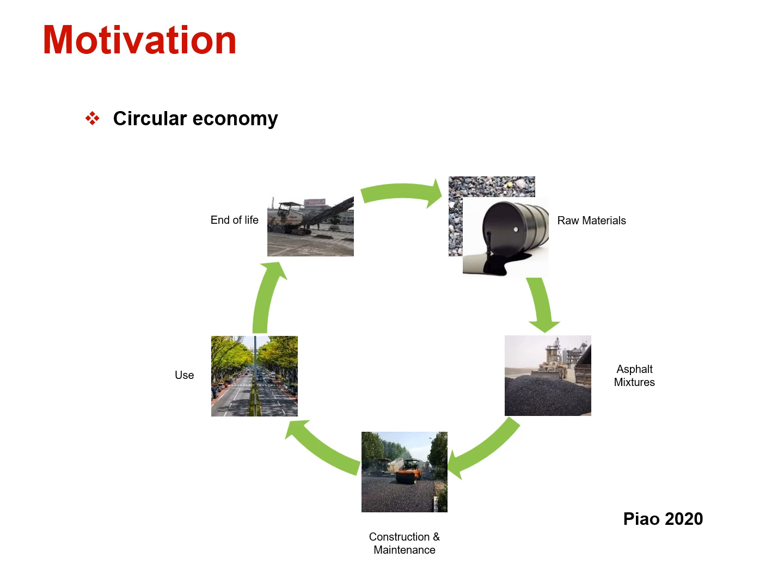I would like to begin by giving you a motivation about why we came up with this TC. So the main motivation is to contribute to the circular economy, of course. So here we're talking about the choice of raw materials, but we want to be environmentally friendly in all aspects of our mixture. For example, when we prepare the mixture, during the construction phase, in the use phase, and the end of life.

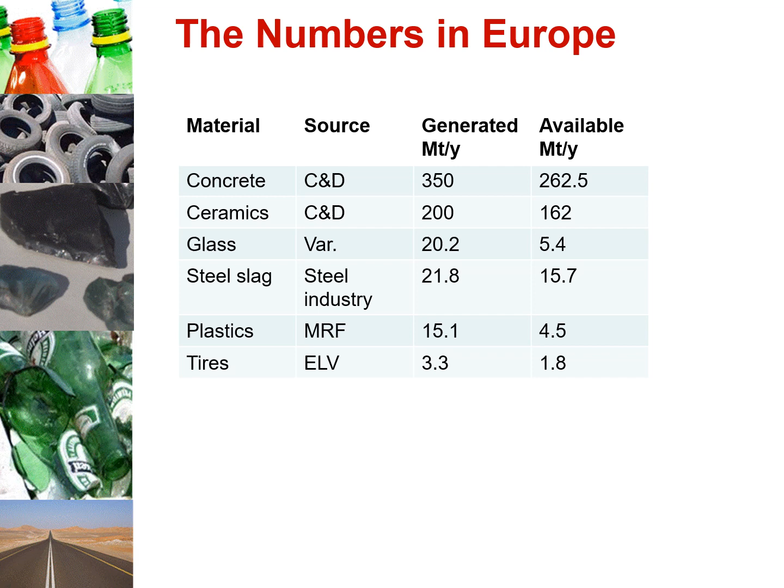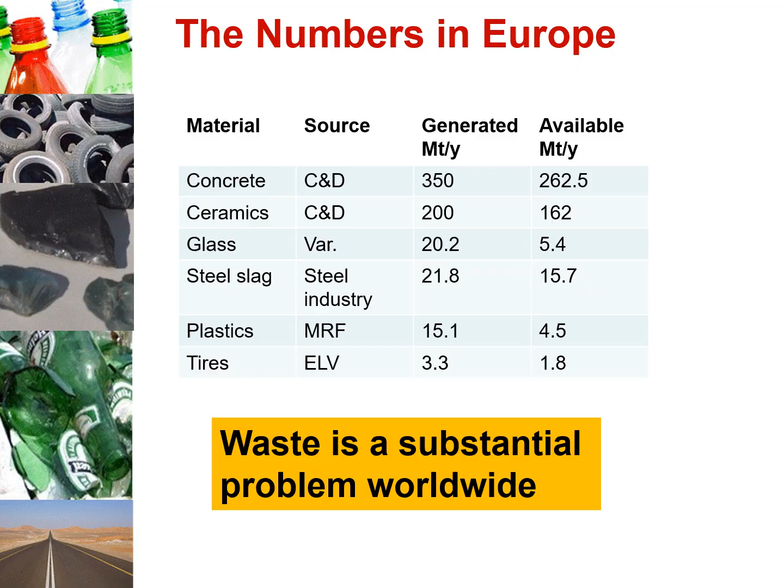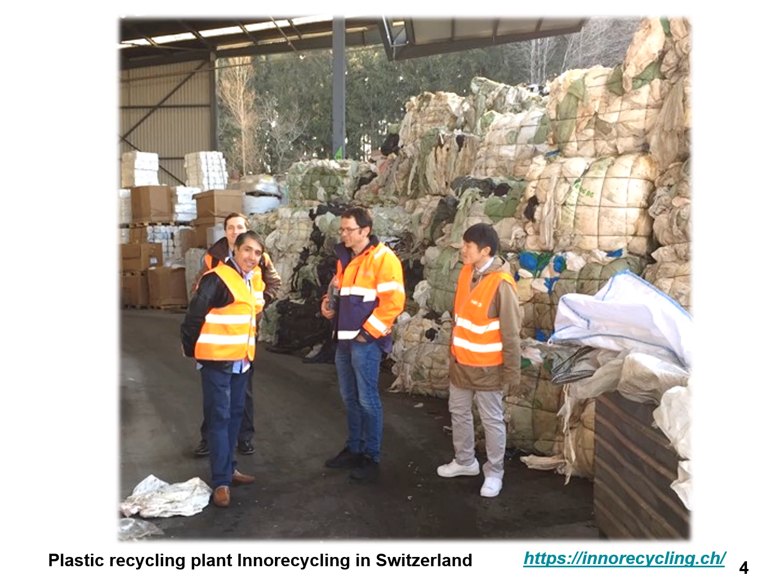So waste is not limited to Europe. There is a substantial problem worldwide, and many countries are trying to do something about it. If you visit any of the recycling plants, like we have done here in Switzerland, we visited a polyethylene recycling plant. Here you see the mountains of waste, and it becomes more of a pressing issue when you see this.

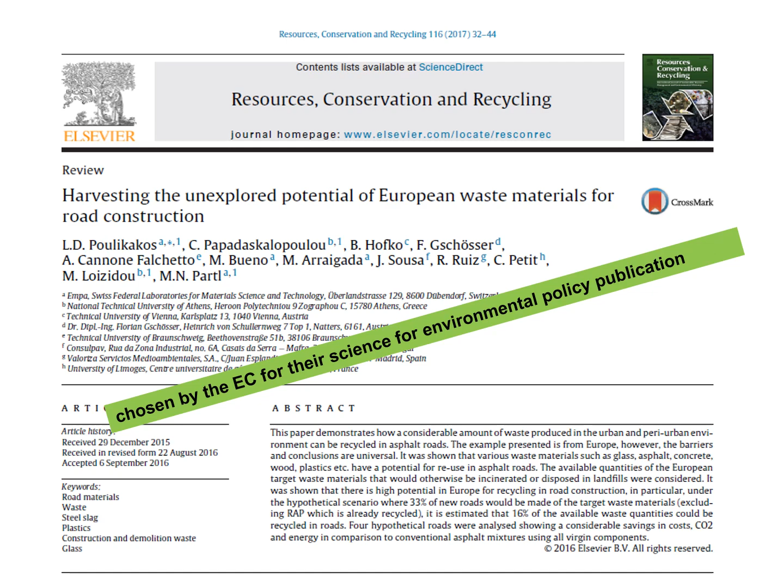In 2017, we published a review paper about using waste, and this paper was chosen by the European Commission for their Science for Environment Policy publication. What we learned from this paper was that there are some waste materials that could be options for roads. They should be exploited further. We looked at various scenarios. We looked at the life cycle assessment, life cycle cost assessment, and we saw that it's possible to save in cost, CO2, and energy consumption. However, the technical readiness level for these materials was not the same. It varied amongst materials and in different geographic locations.

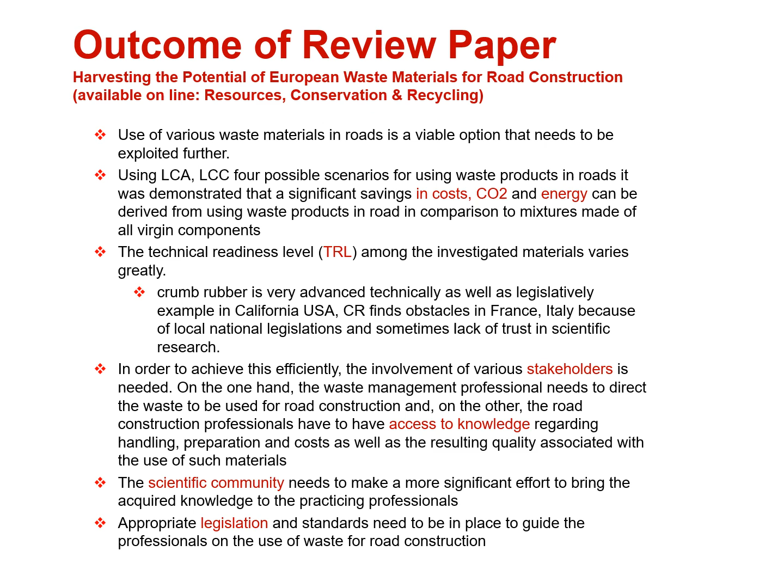So what we saw is that it's very important to have all the stakeholders involved. We have to have access to knowledge on how to use such materials. The technology might vary. And our community, the scientific community, can make a more significant effort to bring this kind of knowledge to the practicing professionals. And that's where RILEM plays a very important role. Also, we need legislation and standards for use of such materials.

Coming back to the technology readiness level, or TRL, it's a scale that was developed by NASA to evaluate the various types of technologies. So, in terms of our materials, you see, for example, that crumb rubber using the wet process has a very high TRL. We estimated it to be from 7 to 9, whereas, for example, recycled glass has a much lower TRL. We estimate it to be about 4, because its use is primarily at the laboratory scale. You can find the whole analysis in the paper that is referenced below.

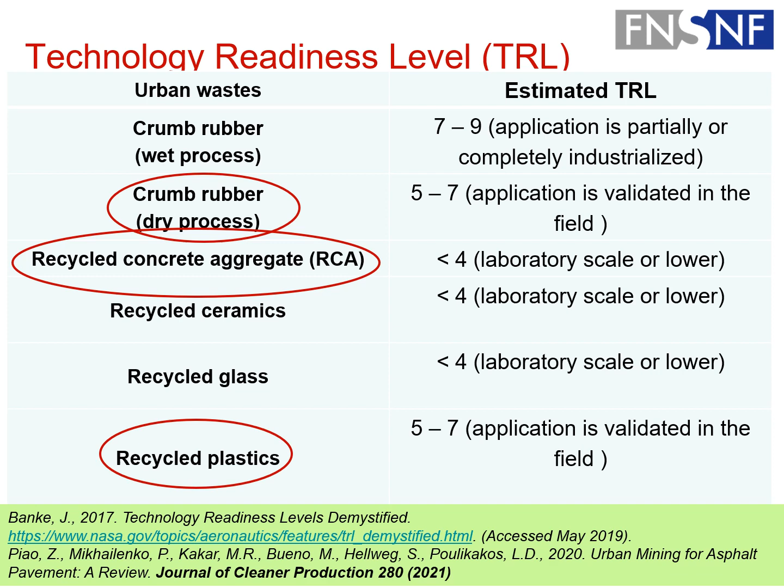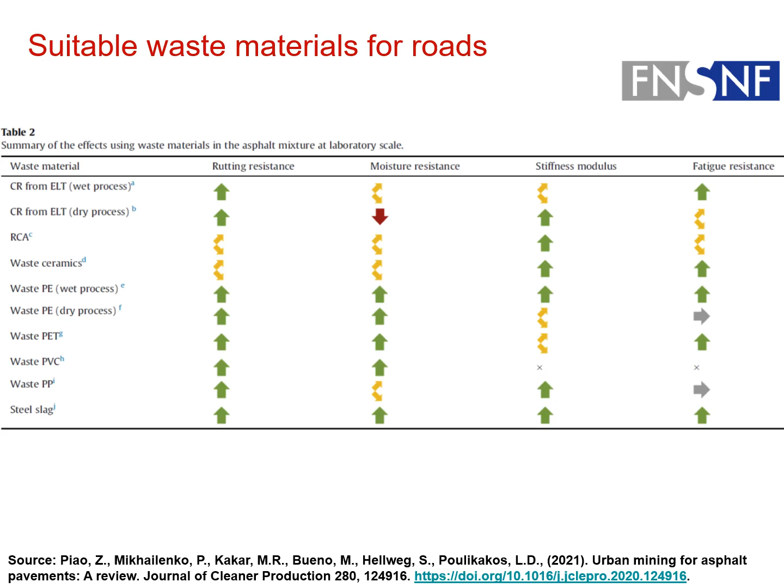Therefore, we put together a technical committee in 2017. It's been active since 2017. And we've had Bernhard Hofko from TU Vienna, who was our deputy chair until 2019. And as I mentioned, Emiliano Pasquini from University of Padua has been the deputy chair since 2019.

We started in 2017 and we've been active for 5 years. We have had more than 100 members. It shows that this topic is of interest for our community. And we've had many active members. So not all the 100 are active, but many have been active.

What we have done in this TC is to combine a literature review with experimental work. We wrote very detailed test protocols, and we also wrote a state-of-the-art report that was just published. We have published various papers in scientific journals, and we are in the process of producing recommendations. Some recommendations have already been published in the STAR report.

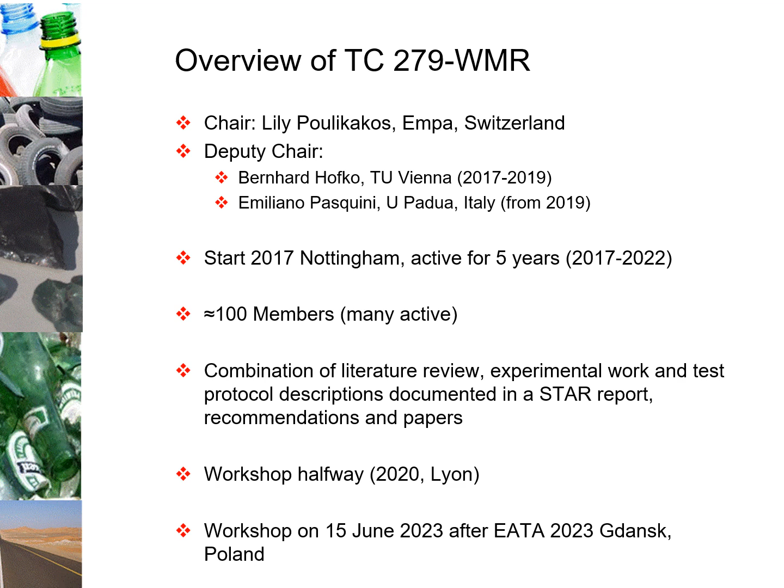We had a workshop halfway in the conference in Lyon, and we also had a second workshop at the end of the TC in June of 2023 at the European Asphalt Technology Association conference in Poland.

We had designed 5 task groups. Task group 1 was on waste plastic modified asphalt binders. The leader was Marjan Tušar from ZAG. TG2 was on crumb rubber modified asphalt binders. The leader was Jorge Pais from University of Minho.

TG3 on waste aggregates in asphalt mixtures was led by Fernando Moreno, University of Granada, Augusto Cannone Falchetto from the University of Aalto, Emiliano Pasquini from the University of Padua. TG4 on environmental risk assessment was led by Oumaya Marzouk from Cerema, Gaetano Di Mino from University of Palermo. However, this TG was unfortunately not active through the life of our TC.

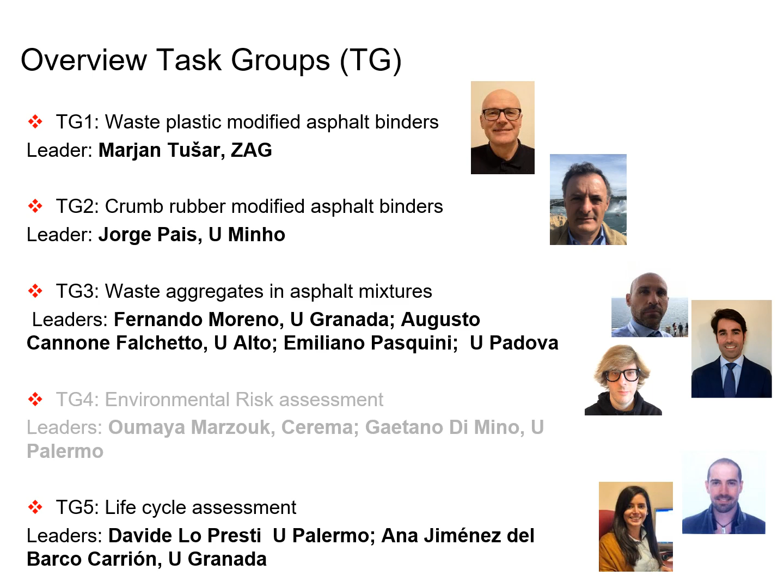And TG5 on life cycle assessment was led by Davide Lo Presti from University of Palermo, Ana Jimenez del Barco Carrion from University of Granada. We were able to conduct various meetings every year since 2017. Also during COVID, 2020, 2021, we were able to have various virtual meetings, and actually the TC remained very active.

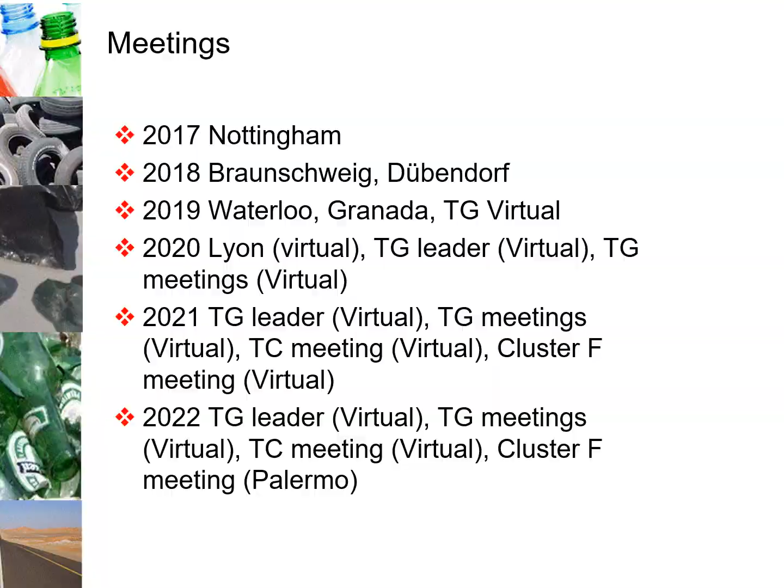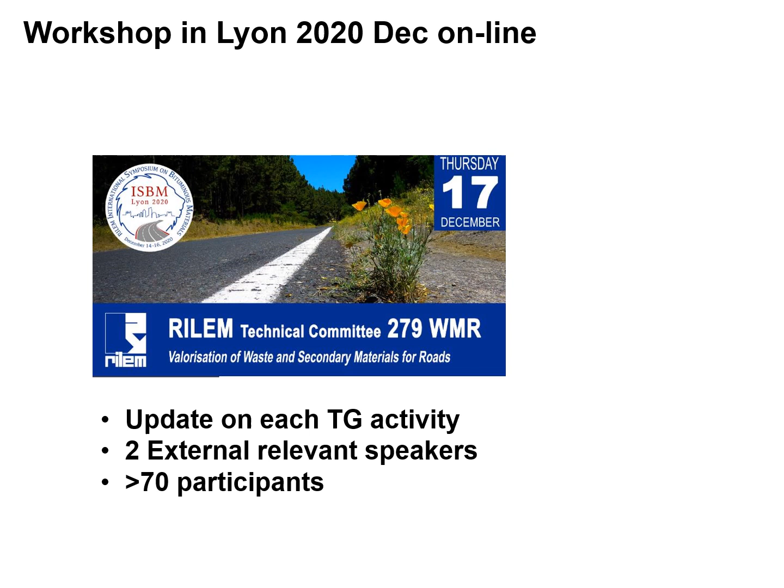Our first workshop was in Lyon in 2020. This was online. We reported on our TG activities, and we also had invited 2 external relevant speakers. We had more than 70 participants online.

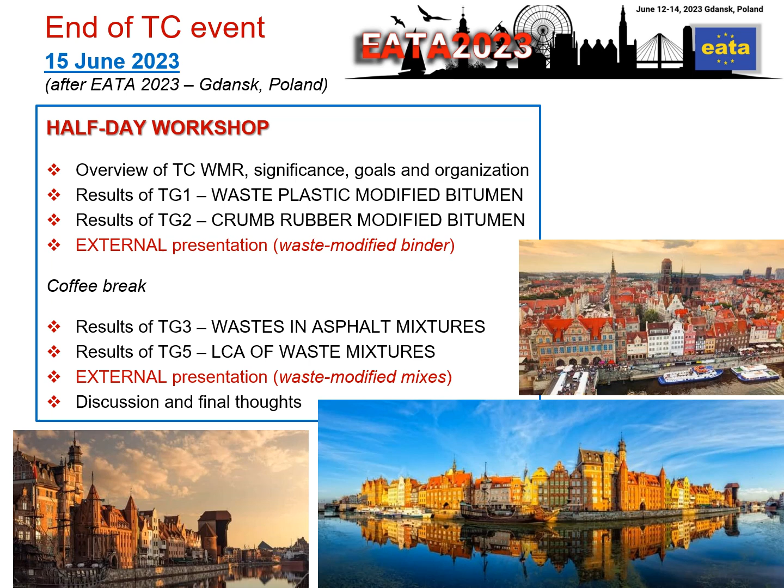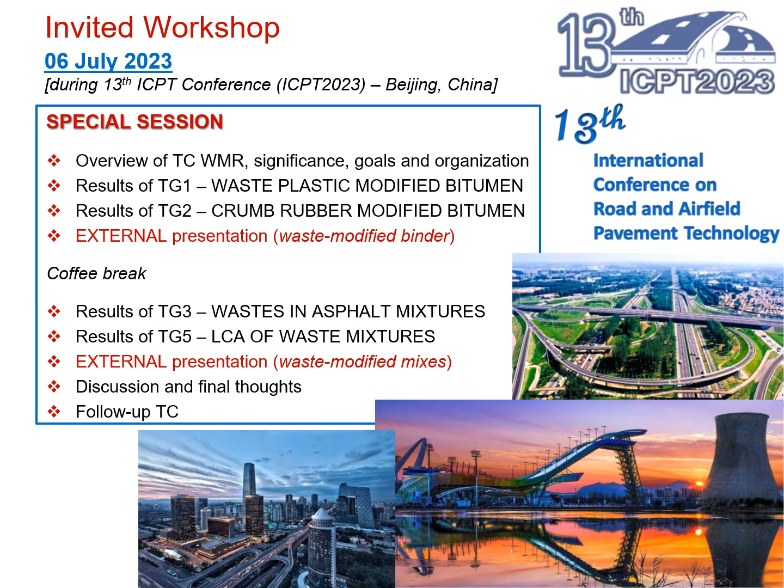Our end of TC event was on 15th of June 2023, just this year, right after the European Asphalt Technology Association in Gdansk, Poland. Again, we reported on our TC activities, various TGs reported, and we had 2 external presenters. We were also invited to participate online at the ICPT conference in Beijing. We invited again 2 external presenters, and we reported on our various TG activities.

I would like to continue by summarizing some of our outputs. As I mentioned, our papers have already been published, and much of the information that I present to you here is either in the papers that are referenced on the slides or in our STAR report.

I would like to give you an example about the TG1 activities where we looked at waste plastic modified asphalt binders. Here we had 11 labs participating using 2 types of polyethylene. These polyethylenes were from the recycling plant that I just showed you in Switzerland, so we shipped the waste materials to all of our partners. And here, this example shows you the round robin results showing modulus compared to the temperature.

And you see that when we look at lower temperatures, up to about 40 degrees, the results of the different labs coincide. However, once we go above 40 degrees, the results seem to diverge. And although we have used the same grade of binder and the same type of PE, here we're talking about a waste material that is inherently not homogeneous.

And once we are at colder temperatures, the whole blend behaves elastically. But once we go above this 40 degrees, then we have elastic material, the PE, that is in a viscoelastic material. So our binder starts to become softer, whereas the polyethylene remains elastic. And so the difference shows up a lot more.

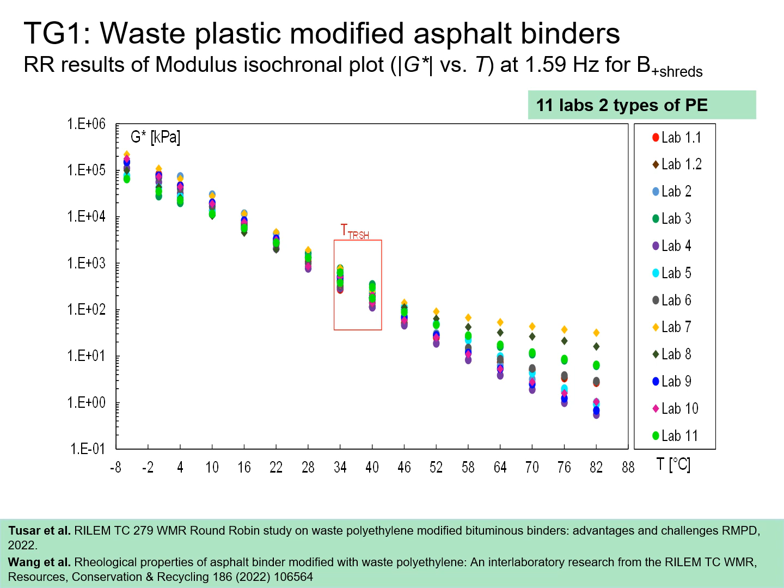An example of the work of TG2 on crumb rubber modified asphalt binders is shown here. In this case, we had 4 labs involved and 4 types of crumb rubber were looked at. Again, you'll see complex modulus values for different binders, the 70/100 binder and 70/100 binder blended with 3 types of rubber and 2 amounts of rubber.

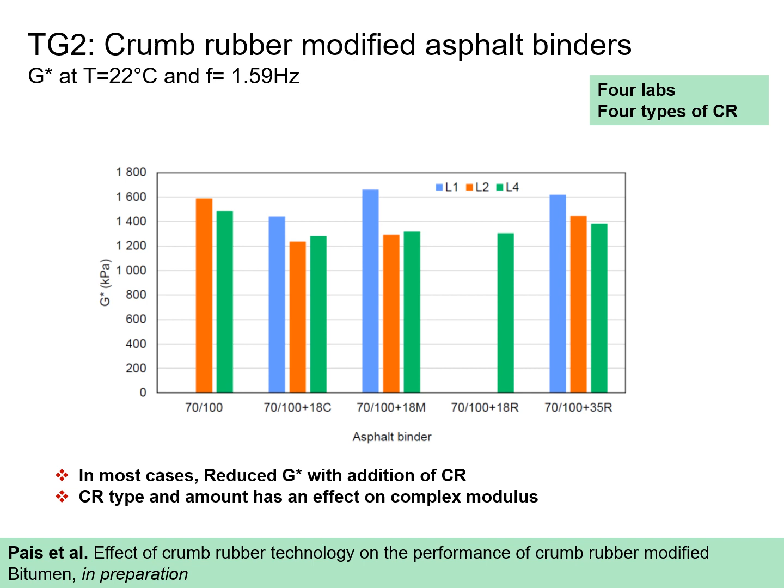And in most cases, you see that there is a reduction of the complex modulus with the addition of crumb rubber. And as is seen here, the type and the amount has an effect on the complex modulus.

TG3 involved waste aggregates in asphalt mixtures. In this case, we had 8 labs that participated using 4 materials. The materials were steel slag, recycled concrete aggregates, construction demolition waste, and crumb rubber. We see here in this table some of the results.

In most cases, the mixtures that were prepared with waste materials had a higher binder content. So you see the optimum binder content is listed here. We were able to reach the volumetric properties that were required, and also the mechanical properties were completely acceptable, as you see in the Marshall stability in this table.

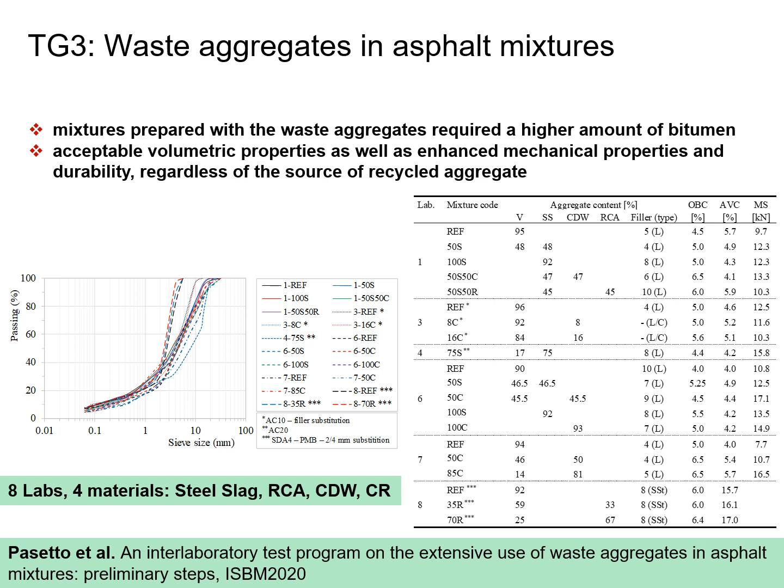TG3 and TG1 combined forces in looking at polyethylene blended with mixtures. In this case, an asphalt concrete with a maximum aggregate size of 16 millimeters was investigated using all local materials except for the plastic waste that was sent to them from Switzerland. This mixture also had a void content of about 4%.

So this example that I'm showing you here is looking at the indirect tensile strength in comparison to the reference strength in dry state. And you see this ratio as a function of the amount of polyethylene. And you see as the amount of polyethylene is increasing, it seems like the strength is increasing in comparison to the reference.

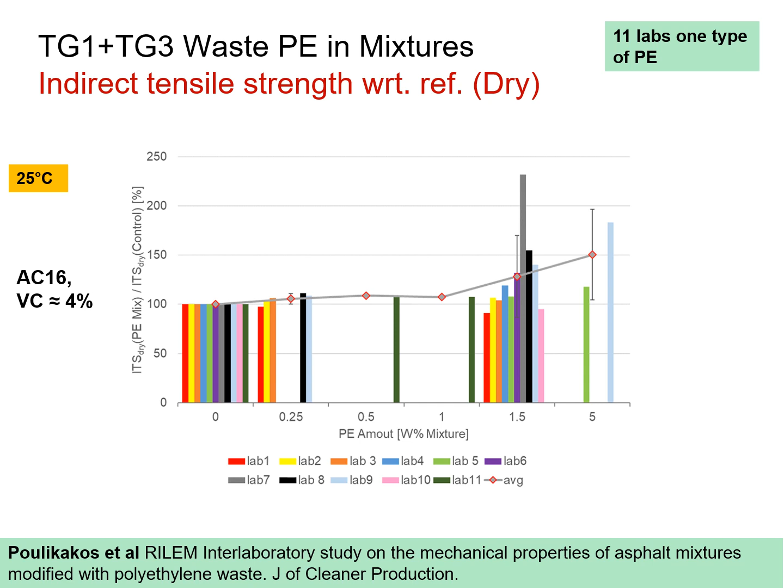TG5 looked at life cycle assessment. In this case, there were 7 participating labs. They developed benchmark values. They looked at the material from cradle to gate, and that means that the performance of these materials was not considered in their analysis. What they have seen is asphalt concrete has about 60 kilograms of CO2 per ton. And SMA, which is the stone mastic asphalt, has more CO2, about 75 kilograms of CO2 per ton.

They have also seen that climate change seems to be linked to the transport phase of the material, whereas energy consumption is linked more to the material supply and the mix design. So in other words, bitumen content.

For selected studies, they have looked at the WMR mixtures that we have used in TG3, and they saw that the stone mastic asphalt and the semi-dense asphalt were more environmentally friendly when WMR mixtures were used in terms of climate change and energy use. However, for asphalt concrete dense mixtures, that was not always clear. And so this work will go on, and they have recommended to do more studies to look at these aspects more.

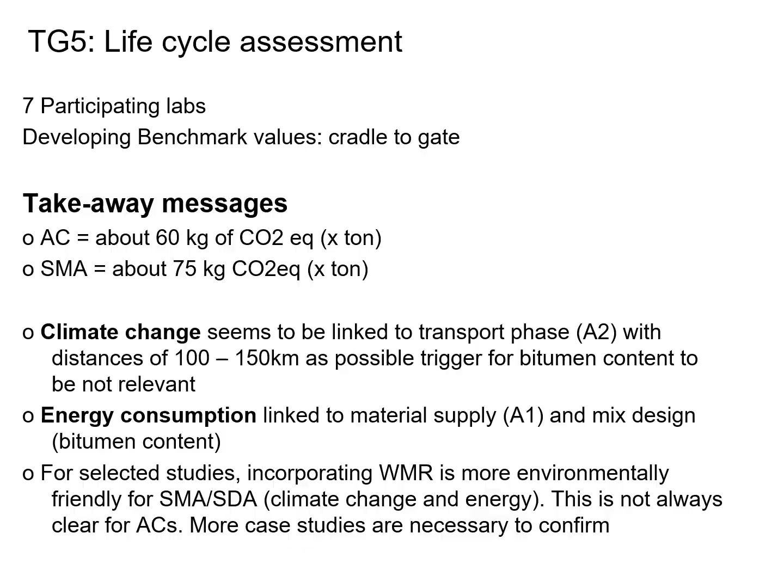I would like to summarize our findings now for you. What we have seen through our work is that we really need to come up with appropriate testing procedures. When we have alternative materials, we might have certain susceptibilities. For example, susceptibility to cracking or rutting or certain types of failures. So we have to make sure that we test for those types of failures. Otherwise, we might not catch that.

We have seen also that traditional test methods might not be appropriate when we have waste in the materials. In case of plastic or rubber, for example, the softening point temperature, we got very funny results there. And we also used microscopy techniques, and through those techniques, we could see that the plastics or the rubbers are still existing as elastic bodies within our mixture. So as our material becomes softer with temperature, these elastic bodies help in performance of the material.

I also showed you some examples when the degree of repeatability and reproducibility could be reduced as we're working with waste materials. They are not inherently homogeneous, therefore they introduce more inhomogeneity in our mixtures and blends. I hope that I was able to convince you that we can see similar performance as the reference mixtures as long as the mix designs are adjusted. For example, in some cases, we had to increase the binder content. So mechanical performance can be achieved.

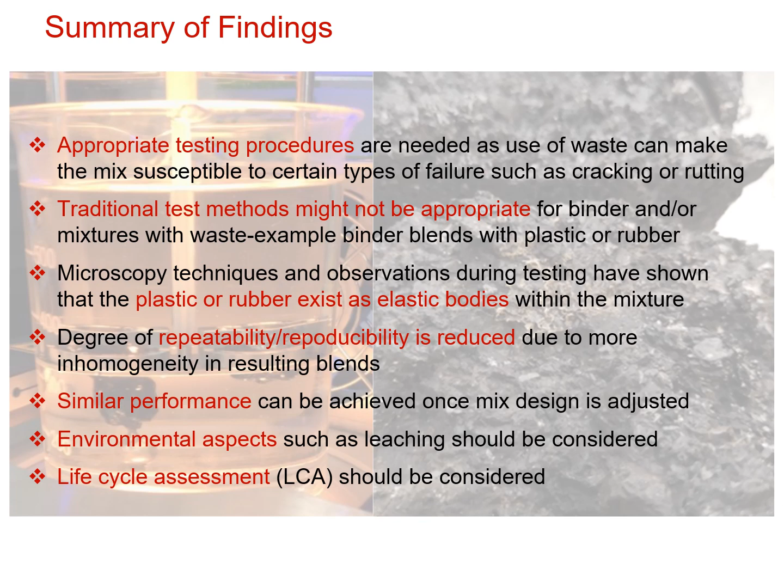However, does it really make sense to use such materials? And in that case, we really need to look at environmental aspects such as leaching and life cycle assessment that looks at the material in its whole life cycle.

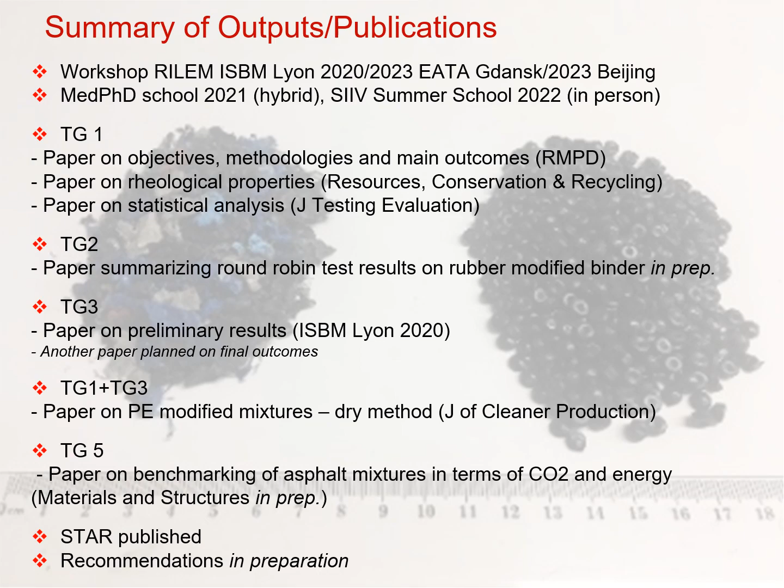As I mentioned, our various TGs have had several publications. You're very welcome to access them, and if you have any questions, feel free to call us. And we also had 3 workshops, as I summarized earlier. We also presented at the PhD schools twice. And the state of the art report was just published, and our recommendations are currently under preparation. Here is the state of the art report that was just published.

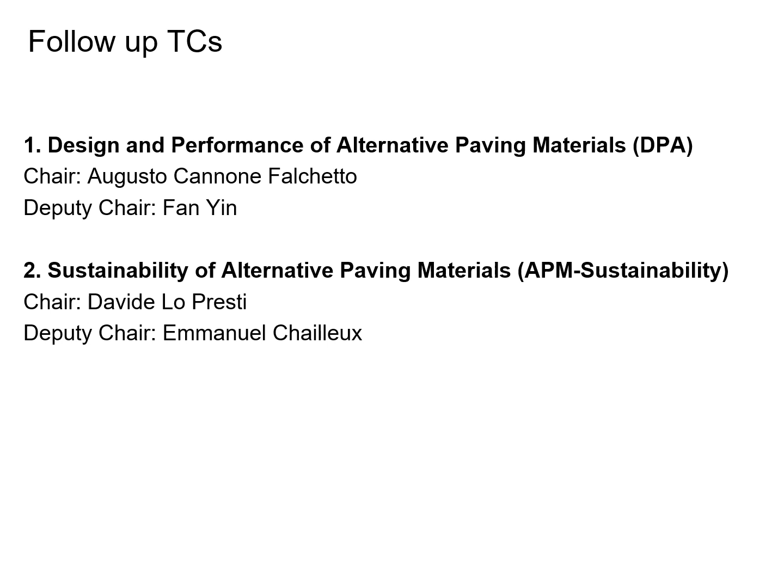I'm very happy to report that the work of the TC continues. There are two follow-up TCs that have already been approved. Actually, at the RILEM week, they were approved. The first one is called Design and Performance of Alternative Paving Materials. It is chaired by Augusto Cannone Falchetto, and the deputy chair is Fan Yin. The second TC is Sustainability of Alternative Paving Materials. It's chaired by Davide Lo Presti, and the deputy chair is Emmanuel Chailleux. I invite you to contact the chairs or deputy chairs if you're interested in this type of activity.